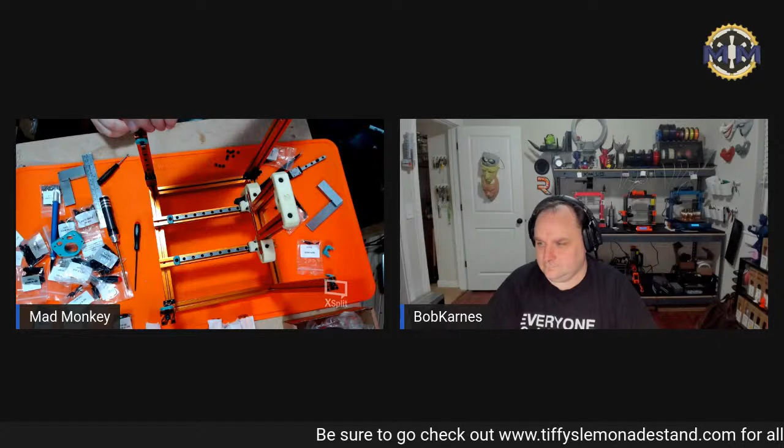Oh, almost got a hernia. It happens. Nope, twice. Three times a lady.

Okay, now I need to slide my bottom panel. Where is my bottom panel?

Look at that, look at it. All bubble wrapped and everything. They got their own tape.

It makes sense, if you're shipping that much stuff, just get it branded. Honestly, it's the funniest thing because Jason is just the kind of awesome, nice guy that you don't think is running this massive company. Like, this isn't a small outfit, LDO, right? It's not like they're making one or two little piddly things and that's that. They are a mover and or a shaker.

I don't want to tell them what they are, so they get to choose. Excuse me, frame, you're in the way.

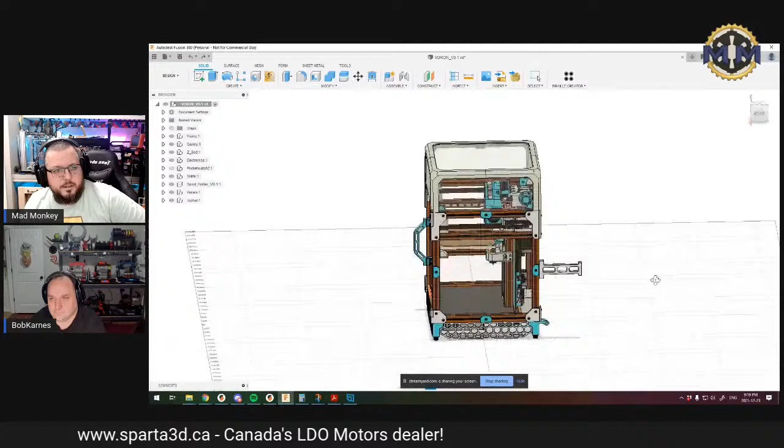Okay, now this is where I'm going to bring up the CAD. So Rain, if you're still listening or you're watching this again later, here's a pro tip: have the CAD open and actually use the CAD so that you can set the wire path. Hang on. Hey, me again. Hey, there he is. I'm actually going to show this right now.

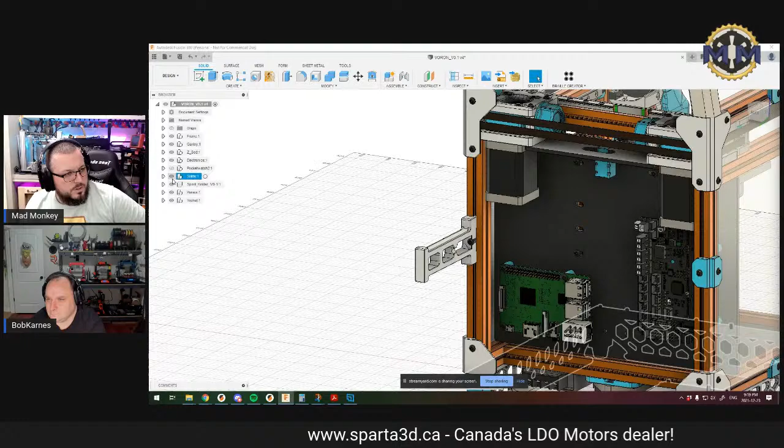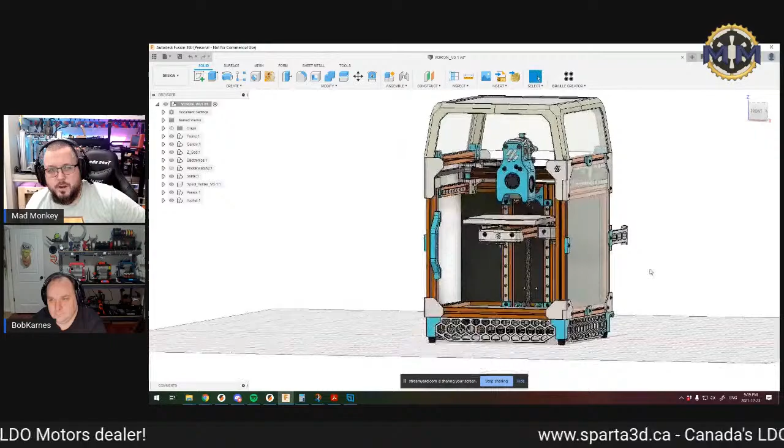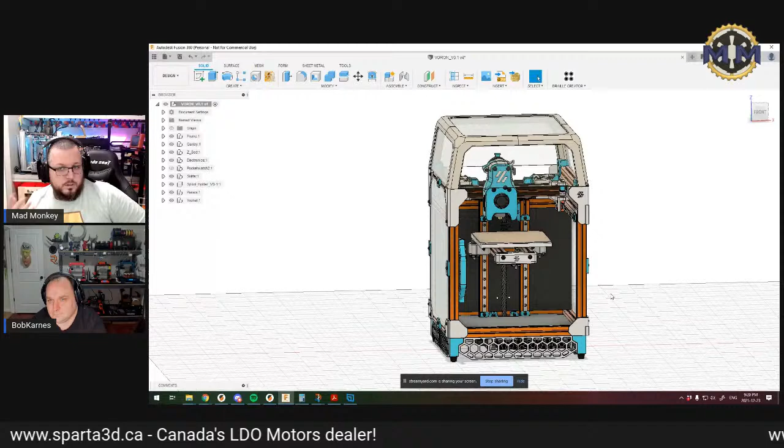But as you can see, I colored it first. So I went around and figured out the anodized color for the frame thereabouts. I picked and chose. So in the Voron system, all of these parts are labeled, and if they have a little A, that means they are accent color. I am a more flagrantly creative person, so I choose what I want. If I want this to be blue, it's going to be blue. If I wanted this to be white, it's going to be white. So I went around and colored it to my choosing, and I also played with the colors to pick the ones that I wanted to use.

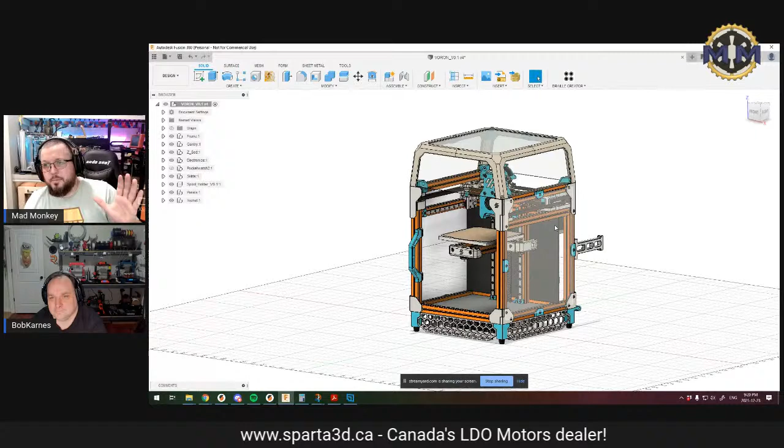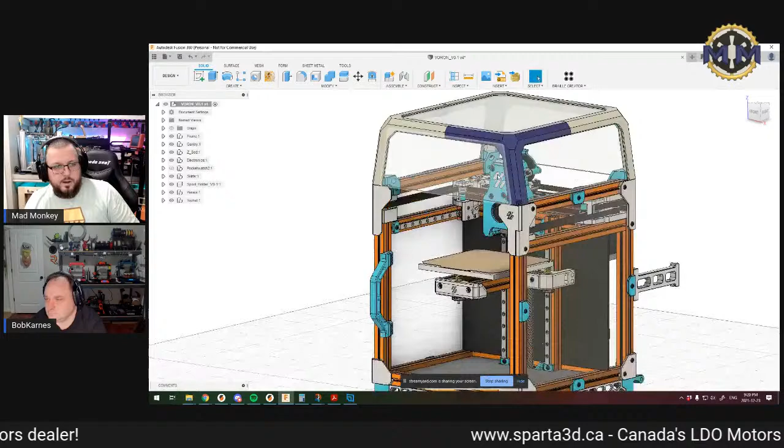And if you don't know anything about CAD, this is a really easy way to start because there is a 'modify appearance' option. With that, you can just choose colors. You can be like, I just want to use glossy paint, I want it blue. Done. Now I know what it's going to look like if it was blue.

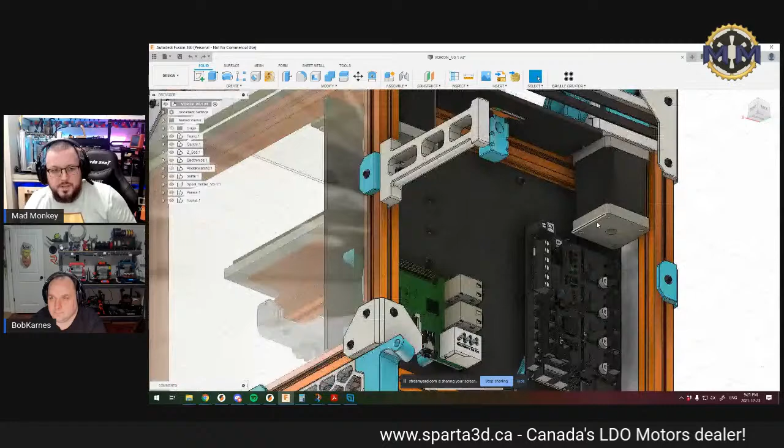But this is also good because it gives me a full 3-dimensional overview of the printer as it sits, which means I can figure out how I want those wires to go. They're not specified on the model, but it looks like you want them running towards that nut—yeah, I would say running towards the nut would be best. Otherwise, it has to come back out this way and travel that whole distance, and you're going to lose panel space and stuff like that are going to get in the way. So I want both of them with the wire path facing the nut.

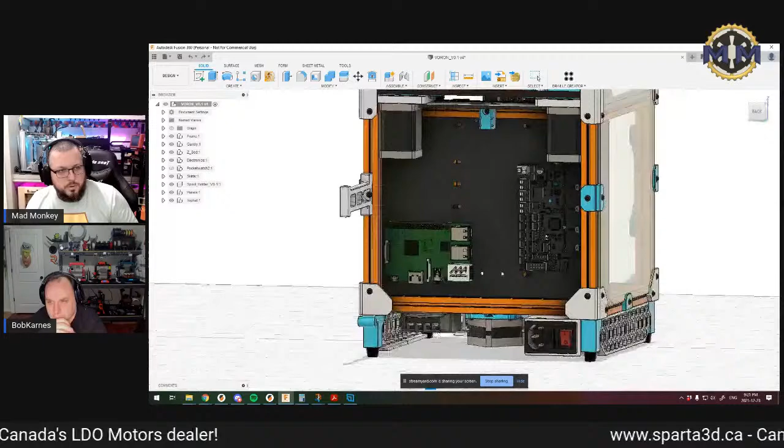So this is also really helpful for one of those things of like, I wonder why they want me to put one nut in there. There it is, right there. It's just helpful to know.

Two things have come up since we've been chatting about this. I had the chat moved, so I apologize. Duff would like to know what our thoughts are on Loctite sticks. And good evening, Peter. Hey Peter, you really missed us talking up the wham bam earlier. It was great.

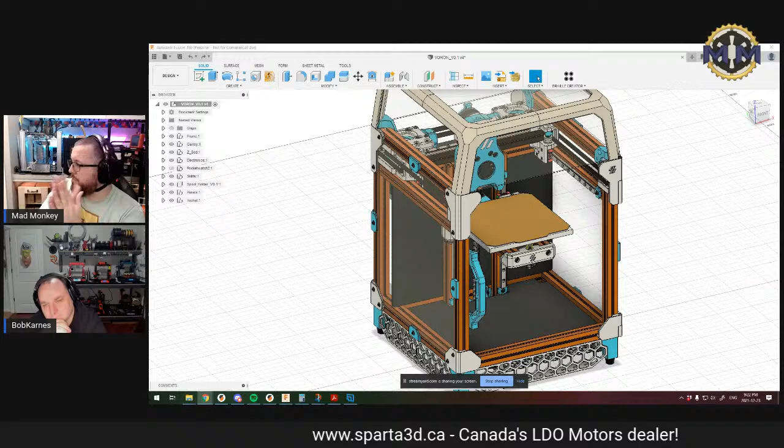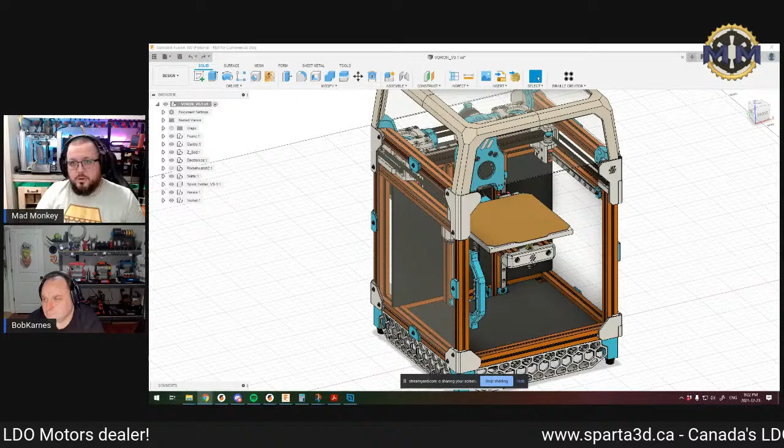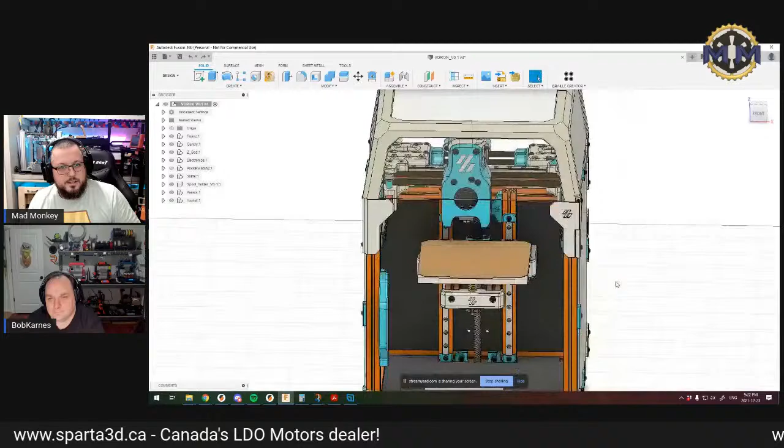Thread locker sticks are okay for small stuff like this because you can just get a little tiny bit. The better solution is just get yourself a really small cup, put a few drops in it, then you can dip your screw into it, nice and easy. Or if you have the thicker gel stuff, that's better for that. If you're doing big bolts for anything, get the tape—they have a thread locker tape. Just put a couple wraps on it. Nothing we really do in 3D printing is going to require that, but I prefer the anti-seize tape. The big thing with thread locker is a dab will do ya, and keep it away from your printed parts.

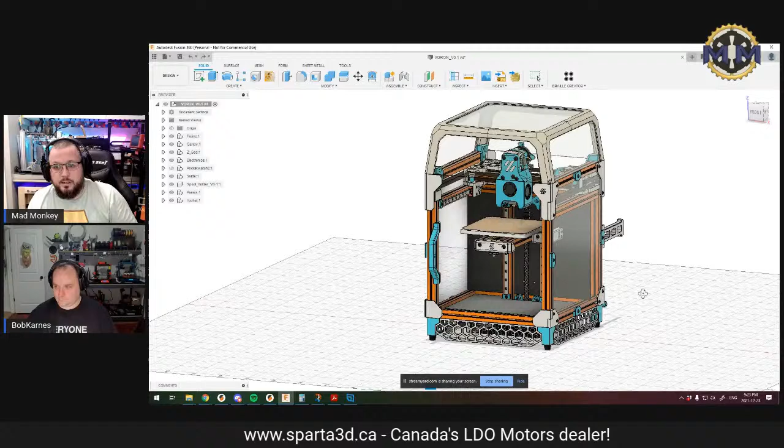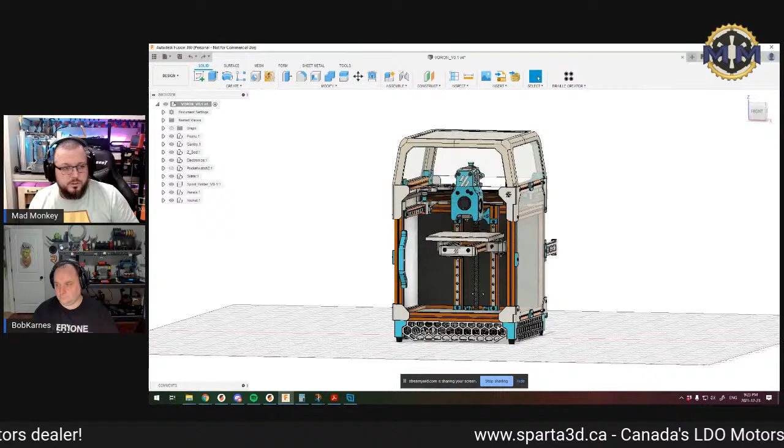So yeah, that's what I do when I'm planning one of these builds—that's a little inside point there. As I look at the printer, I look at the materials, I look at the choices of what is available, and I play with it. I've done this with all of the printers we've done. I've looked at all of them and looked to see how I can color it. What is it going to look like? Is it better that I make these parts blue or pink, or can I go 3 colors? Can I go 2, 4, anything?

Thus ends my Fusion tutorial, my TED Talk. Well, see, now you've said those words because our buddy PLAman there would like some Fusion tutorials.

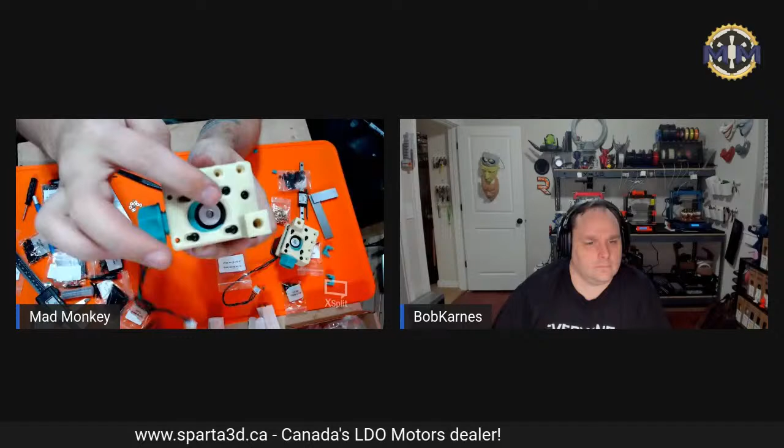It moves. Now, I'm not cranking these down to the moon right now because, well, there's just no point. The whole point of this setup is you can loosen these four screws, and then you turn this knob, and it will pull the assembly. Did you look down the barrel of it and see if the gear on the motor lines up with the belt path? It does. This one I think I need to drop just a hair, though.

Sometimes precise measurements are good.

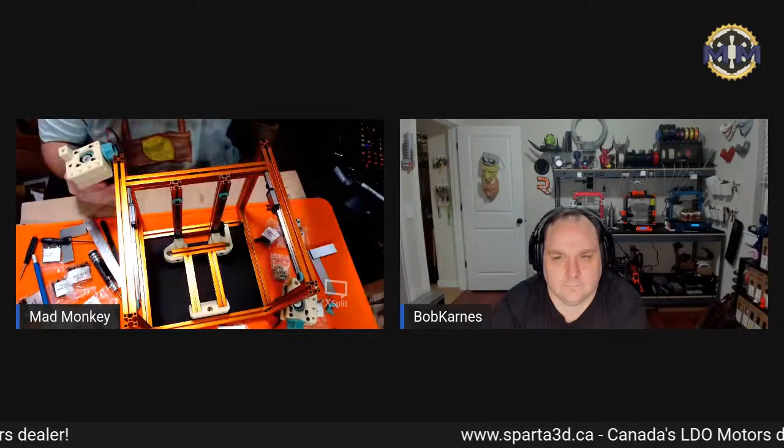Okay, this is where... I wish they had carried some of their logic through with this. Uh-oh, there's no way to see anymore what number, like whether this is A or B.

Okay, but it's really not necessary. The towers go in the back corner. Yeah, I know, it's just, again, it's one of those things that the nice to haves, you know?

So you know what you just did there, and I don't appreciate it. What? You just made me defend a Voron design choice. Look man, sometimes it do be like that. Can't believe you tricked me like that.

Okay, the screws are fastened into the preloaded nuts. Slide the nuts into position prior to placing the part. A skewer, okay.

It looks like I need to use 6 here. Is that what I'm seeing? Well, you've got 2 on the side. And then right.

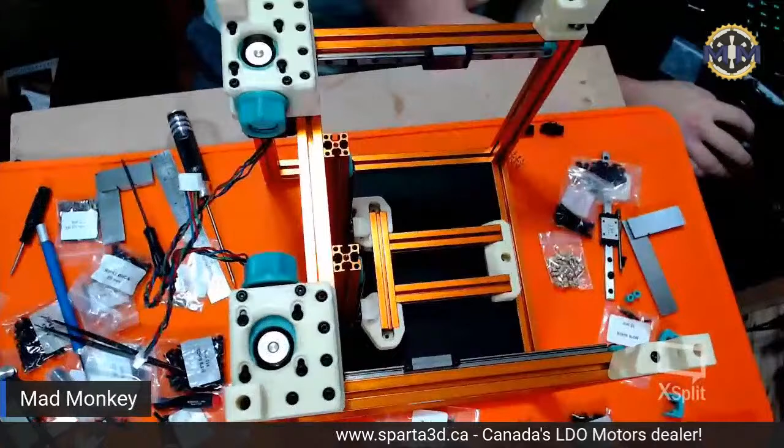I think I'm going to need to take a brief intermission. You've gotta go eat supper. Yeah, well, I'll entertain the people - and by entertain the people, I mean I'll just keep building. I'll be back in just a few minutes. If you want, I'll turn off the camera and you can just pop me out of here. I'll just kick you out right now. Boop, there he goes, he's gone. He's in the back, he's doing his thing.

Oh, look how much bigger it is. That's great.

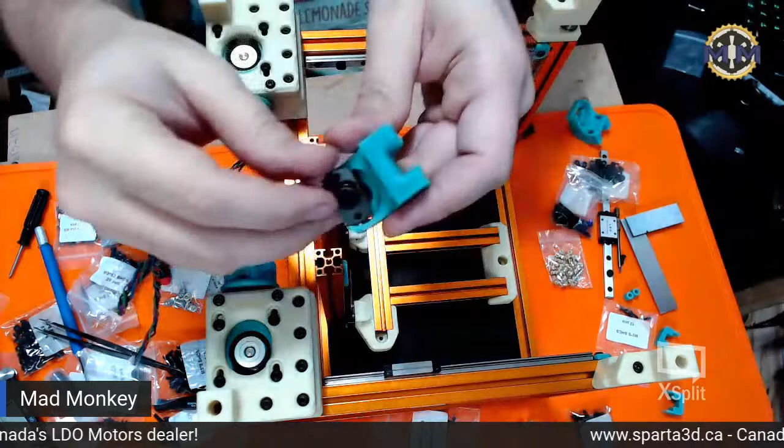All right, printed part. Now this section here, there is a specific part needed from the LDO manual. It does say LDO has recommended printed parts. I didn't see that before printing the parts, so I printed both of the pieces. I don't know exactly which one I need, so I'm going to use some measurements here and determine which one is the right one. The T-nut obviously doesn't fit in there, so this one's not the right one. That fits in there, that's the right one.

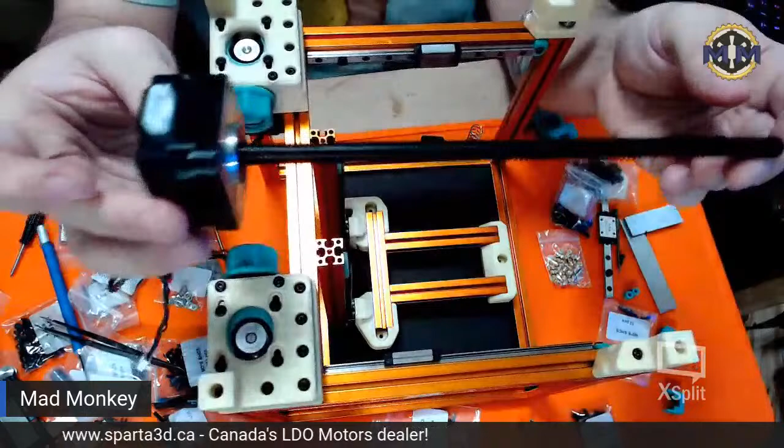This is a Teflon coated lead screw, so it's just one more layer of friction lubrication and drag reduction, especially with the POM nut. It really goes on...

Super easy, wham bam, needs a bigger mat. They do need a bigger mat. I need a bigger mat.

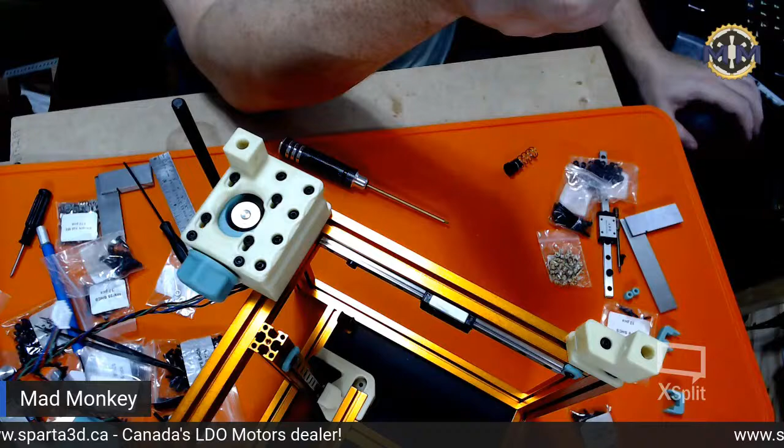All right, some more M3x12, and they're going to go in that back hole.

I don't know about the EU version, Duff. It might be steel, it might be... might be the Teflon. Well, I tell you, I know how to find the answer - when Rain gets his kit, I'm sure he'll be happy to let us know what it is. I can just ask him.

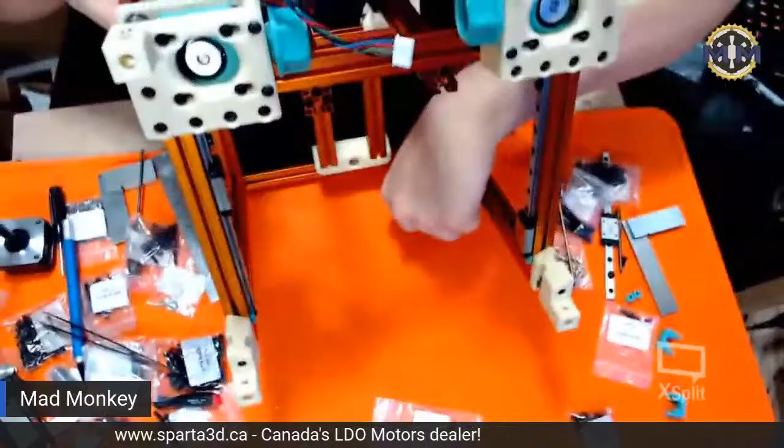So now this is going to attach to these two screws, or these two nuts, sorry, that are right in there.

You're going to have to stand up and get in the way a little here.

Now, I don't think you need to be too delicate with tightening these up. I do want to make sure I'm actually in the nut, but this is going to move back and forth depending on where your Z lines up.

They don't use PTFE wire in the EU. Interesting.

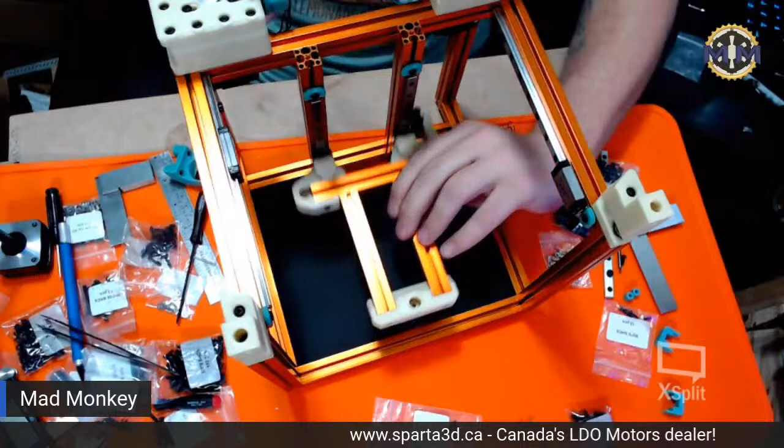Okay, sorry, I have to turn this away so that you can't see what I'm doing, because it's not lining up for some reason, and I'm not sure what's the culprit here.

The screw is just being difficult, it doesn't want to thread in. Let's try a different one. There we go, gravity was fighting me on that one. I just tipped it back a little bit, and then I was able to get the screw to catch.

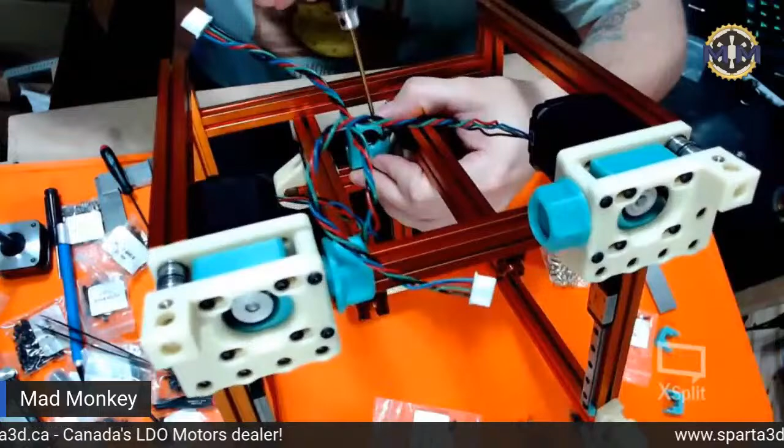That's in. Now we need a little assortment of screws here. It looks like a couple M3 by 8s, and M3 by 6.

Yeah, these screwdrivers, I got them - I wish I got them at Sparta. This one I got from Sparta, which is a multi-tip one, which is fantastic. These I just got on Amazon as some RC car screwdriver set. They're really good in that respect, just comfortable handle, easy to use.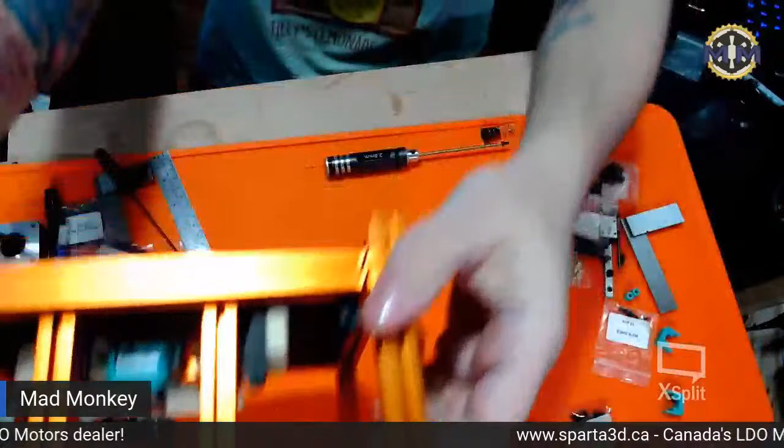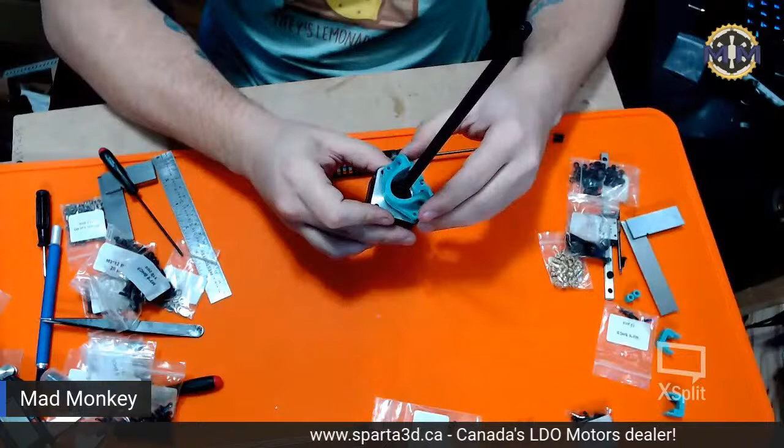So now that I need another printed part, which is that one, and our lead screw, which is this one. And it goes on something like that.

Now this part, I want to just make sure I'm able to set the output for the wire. Just based on how this is going to attach into the frame like that, I want my wire facing into this underside as best I can. I think... no, I want it to go the other way, because the wire has to go up the back panel.

So I'm feeling like that looks to be about the way to do it, because if that clips up into there, then this wire can skirt over top of that and up and in. So that'll be good.

Oh, I wouldn't call these luxury, David. I mean, they're probably $20. But they do make a world of difference. And then using your fusion skills, you can pop open and just make a quick holder.

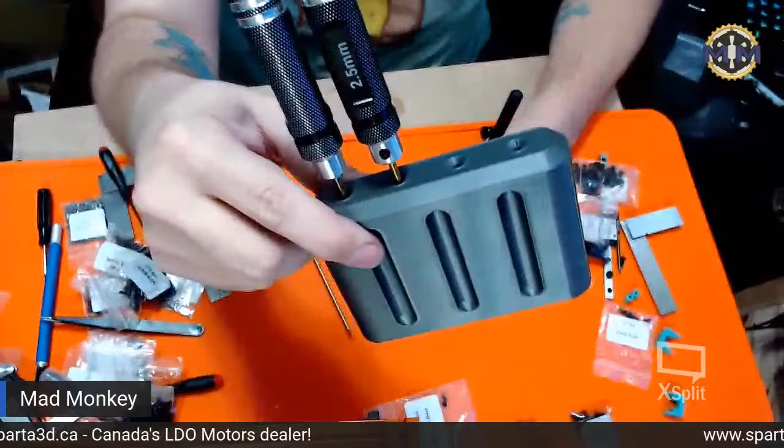Says we need to flip it on its back now, and preload some more nuts.

All right, T-nuts here. Yeah, the length is nice on them because there's enough room to get in. If you really needed to, you could shorten them really quickly. That's the grub screw, it's mounted onto a flat that is milled on the shaft, but then if you needed to temporarily, you could tighten it up and just use it for a short time and then bring it back to get it on the full lock.

Okay, looks like we need T-nuts in basically everything. And these are probably panel mounting nuts. Okay, looks like one. That's a bunch of nuts. And then I need some feet.